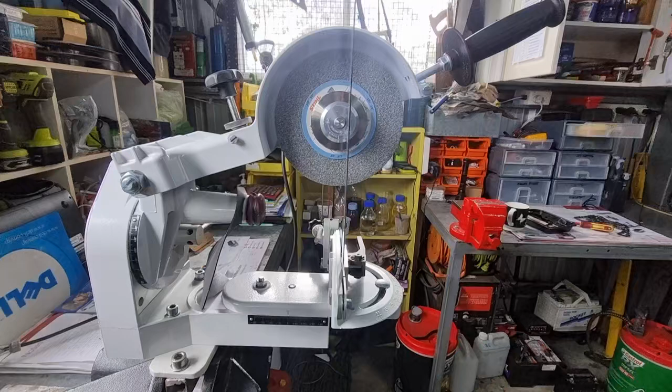Someone was asking me, can we do a 10-degree downward tilt on a USG grinder? And I said, yeah, sure we could, there's no reason why we can't because it's got a slide-in vise.

But if you look at the USG chart that actually comes with a USG grinder, you won't see anything that refers to a 10-degree downward tilt. What you will find in column B, column A refers to the grinder tilt, which is the top plate angle, that's the grinding wheel angle that comes into the tooth. So that's A. B is the sliding vise, and C is top plate.

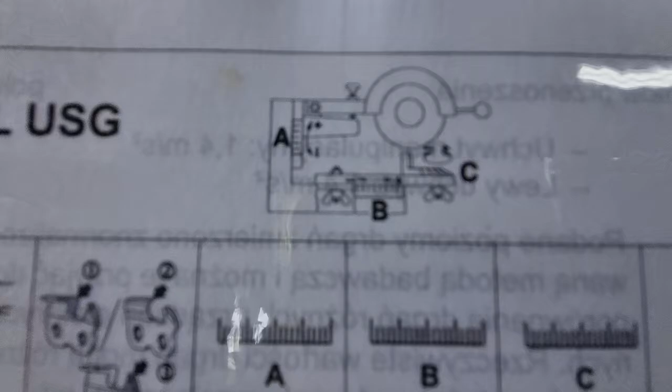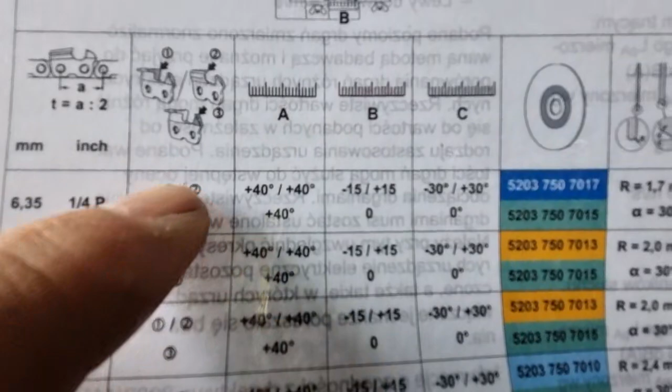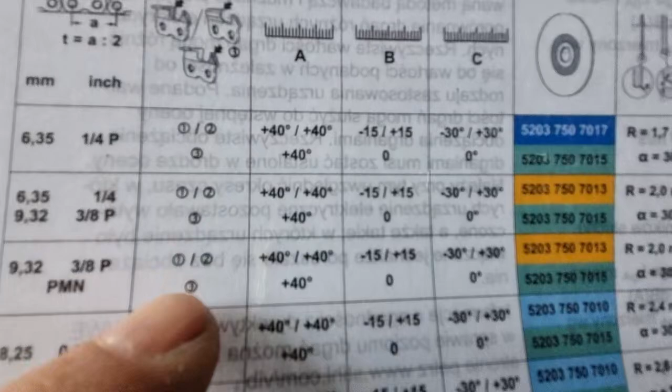So when you look at the little grinder, you'll see A, B, and C, that's what it corresponds to. You'll also see a little tooth there with number 1, number 2, and number 3. In these little check boxes, you'll see 1, 2, and 3 down the bottom, so that corresponds to that. This is left, right, and this is for the rakers, so all on these bottom boxes, number 3 is all the raker settings.

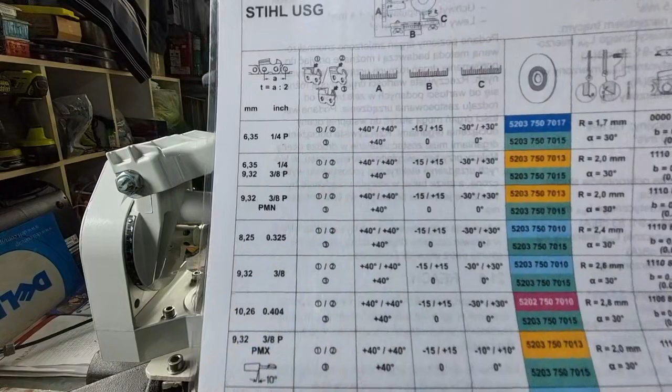So don't get confused. If we look, it still uses 40 degrees on virtually everything, except when we get to rapid hexa down the bottom. RH is rapid hexa, and these are your tungsten carbide. But from there upwards, it's 40 degrees for everything, so you could virtually set and forget.

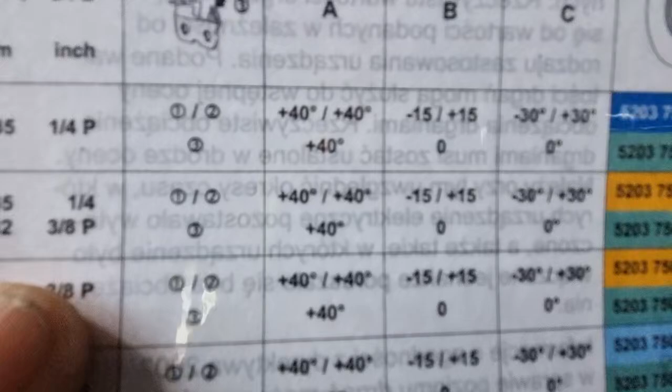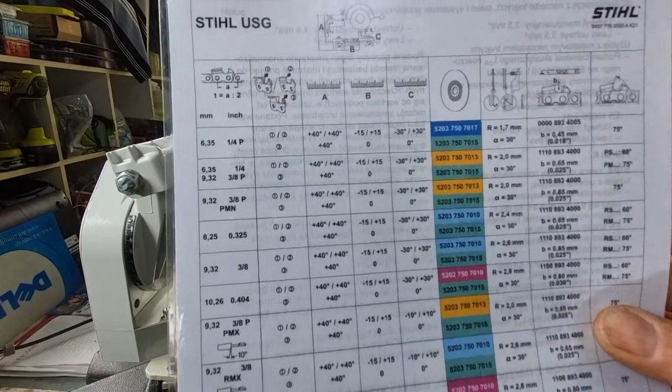The B scale refers to the vise, and if you have a look, you'll see -15 / +15, and that goes all the way down till we get to the same thing, right down to the tungsten carbide and also the rapid hexa. This scale here refers to a top plate angle, so why on every chain except the tungsten carbide and the hexa is it -30 and +30?

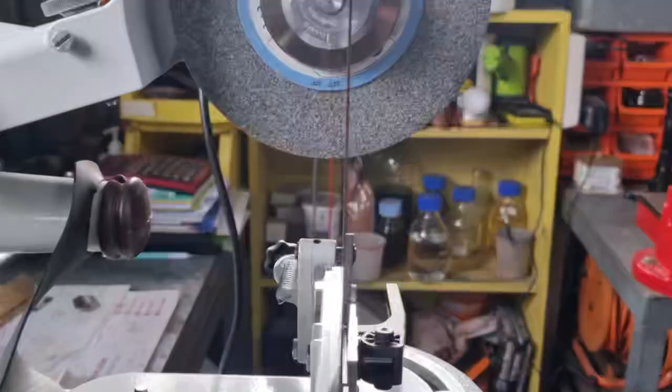This scale is in millimeters, it is not in degrees. That's where a lot of people get confused. So if we zoom in there, hopefully you can see that, that's in millimeters.

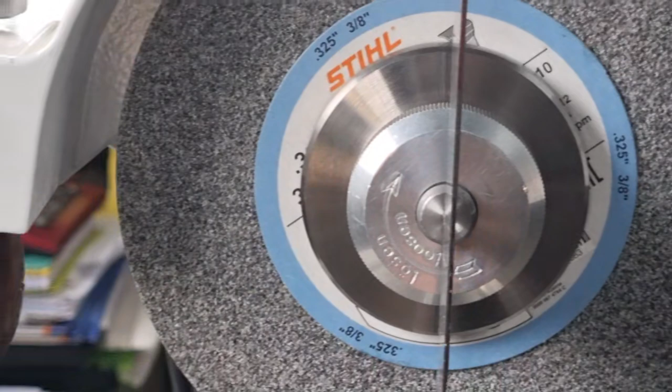Now, what I wanted to draw your attention to was when we spoke about the -15 and the +15, that is what is referred to as offset grinding. By offset grinding I mean that if we zoom in and pull this wheel down and set this up correctly, you'll see that the wheel, the ruler that I've inserted into the gap here, into the bar rail where your chain sits, in that gap I've inserted a steel ruler, which is quite straight. I've set the B scale on 0, and I pull this down into the grinding position, and it's right in the middle. But as that wheel gets smaller through grinding, we're going to have to offset it.

To give you an example, this wheel is 140 millimeters in diameter, and it's fine. By the time the wheel gets down to 130 millimeters in diameter, we're going to have to go 1 millimeter that way. By the time it gets down to 120 mils, we've got to go 2 mils that way. By the time it gets to the end of its life, 110 mil, we've got to go 3 mils that way.

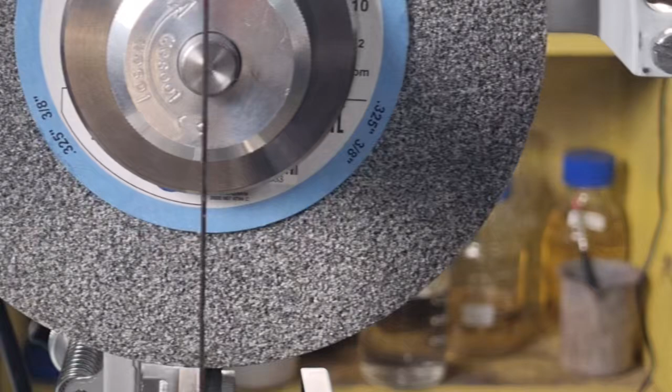Now, to show you why you have to do that, just look up there and say, oh look, look at the center of the spindle, look how far it is from the steel ruler. But as we bring the handle down, it gets closer to the steel ruler, the center line comes into alignment, and by the time you get down to the bottom, it's in perfect alignment. And that's where you've got to keep it, in that alignment.

Now, how does Stihl get around it? They get around it by offset grinding, meaning that you move the vise to minus 15 or to positive 15, depending on whether you're doing the left or the right hand tooth. That means you go past the centre line and you'll never have any centre line issues as the wheel wears down because you're going 15 millimetres.

Now, not to confuse you, when we look at the left and the right tooth of a chain, it's viewed from the back of the grinder. I'm viewing from the front, so we need to go round the back.

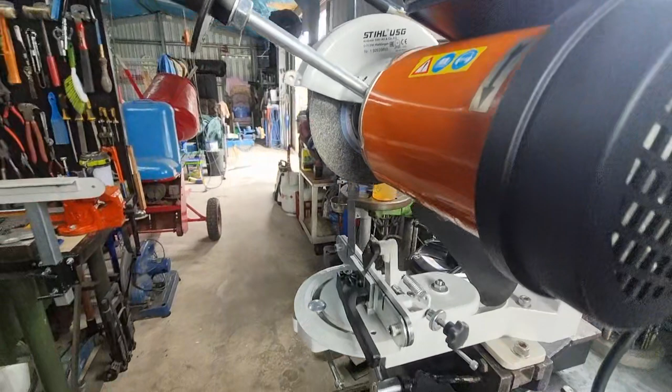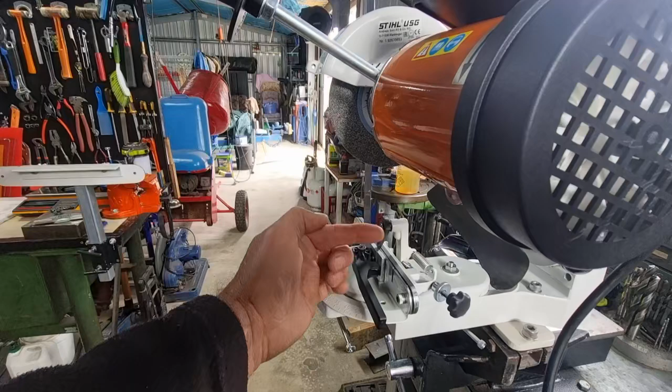So if you were to look at that USG chart, it's got 1, 2, and 3. Number 1 refers to a left-hand tooth, number 2 is a right-hand tooth. So with a left-hand tooth, if you look at the USG chart under column B, it'll say you've got to go minus 15 in that direction. For the right-hand tooth, you've got to go positive 15 millimetres in that direction. That is offset grinding, 15 millimetres is quite a fair amount from the centre line.

And that's the way that works. That way you don't have to worry about that alignment that I was showing you. But if you've got an Oregon grinder, you can go on Oregon's website and they'll show you how to put a ruler in and do that with an Oregon style grinder.

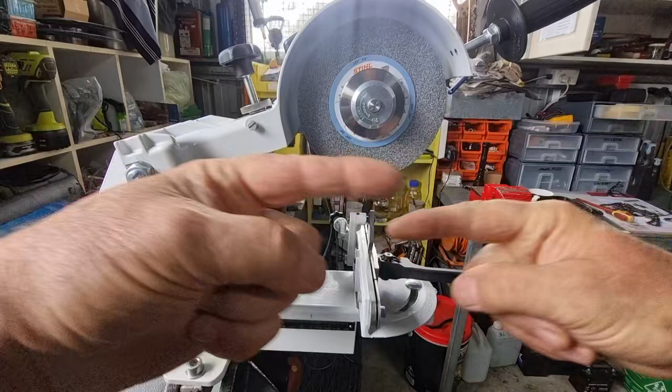Now, the 10 degrees downward tilt. To do a 10 degrees downward tilt, it's offset grinding as well. But rather than cross over that way, which is what the USG grinder is doing with the negative and the positive, going from one side to the other, when we do a 10 degrees downward tilt, and if I stand back here, this is the left tooth and this is the right tooth, viewing it from the back, we move outwards.

We move away from the centre line when we do a 10 degrees downward tilt. And I'd probably give this about, on the scale we've got here in millimetres, about 6 millimetres to this side, 6 millimetres to that side. So when we put a chain in, we'll do that now.

This is just an old chain. And it's the opposite of an Oregon. So the left hand tooth is on the outside, the right hand tooth is on the inside. So if I was going to do a left hand tooth, I would loosen the vise and come over about 6 millimetres like that. If I was going to do a right hand tooth, which is this side, I would push it 6 millimetres to the right side.

Just remember that whichever tooth you're doing, right or left, you've got to move the vise away from the centre line. So you move it that way for the left hand tooth, that way for a right hand tooth. And that's it, that's all you've got to do. You'll get the same tilting that you would get on an Oregon style grinder.

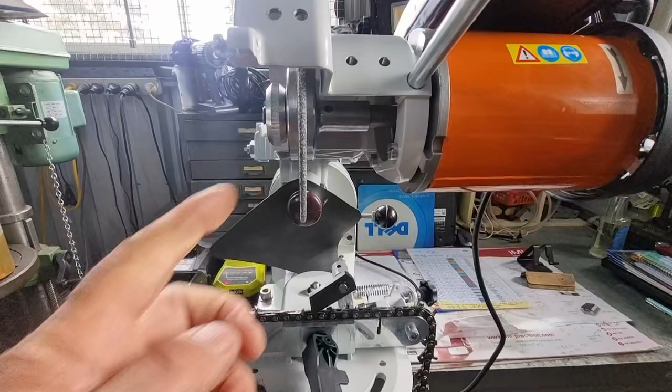Only one other point I would make is that the grinding wheel on the Stihl USG grinder is only about 4.1 millimetres maximum. Make sure that this profile, that U shape on there, is the right shape. If you have the wrong shape here, you will definitely get a different side plate angle.

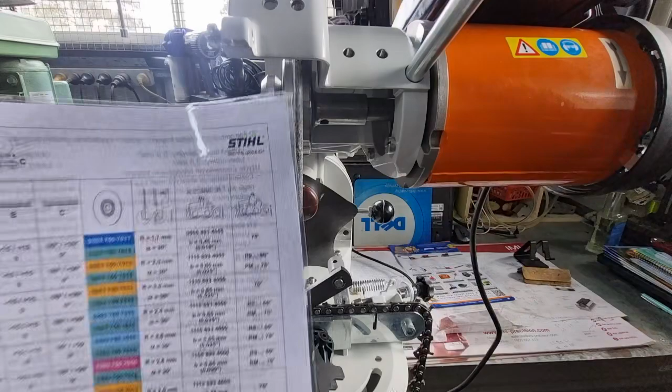Now, normally what they're saying to you, if you follow the Stihl USG chart, even though you set this head to 40 degrees, if the wheel's dressed correctly, you generally end up, if you look at the last column on a USG chart, with either a 60 or 70 or 75 degree angle. That's what you should end up with.

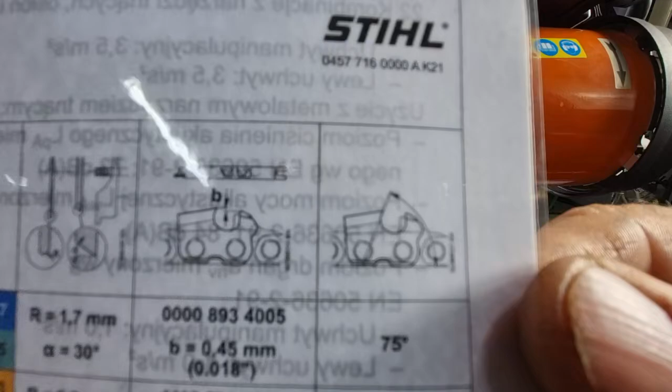And that's what the little icon up there means, that's the side plate angle. There it is, 60 degrees, 75. So even though you set this to 40 degrees here, you may set this to 40 degrees. Now, I hear some of you say, 40 degrees, wow, that sounds like a fairly aggressive angle on the head.

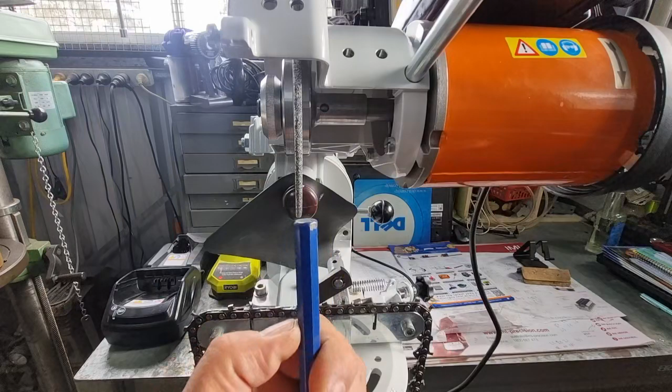Stihl don't use the 90 degree reference point. On a Stihl USG grinder, the vertical reference point is 0. So we're actually moving over to 40 degrees. On an Oregon grinder, you start at 90 degrees. If you were to move 40 degrees in that direction, it would be 50. So that's what it is.

Now, typically on an Oregon grinder, a lot of times we move over from 90 into the 60 degree position, so that's a 30 degree movement from vertical there. On a USG grinder, we start at 0 and we would move over to 30, so we've only moved 30. Everything is the opposite on a USG grinder.

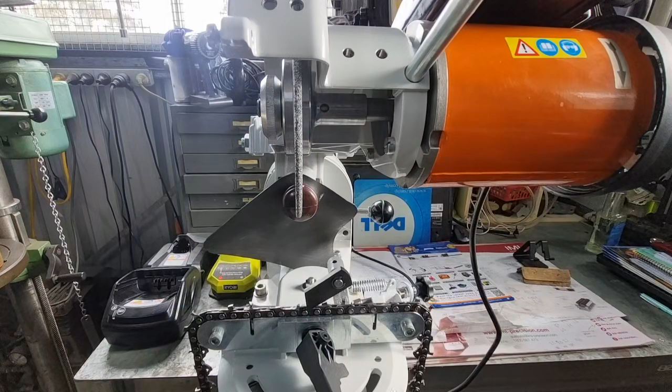It's the same as the teeth here. On an Oregon grinder, you'll view the teeth from that way, so left and right is the other way around. So everything's a little bit different on a USG grinder. I actually prefer it this way. I'm used to it, doesn't matter whether I use Oregon or Stihl. I'm used to both. So that's pretty much it in a nutshell.

I do have a tooth, part of a chain that I ground up before, and I'll bring it over to the bench and we'll have a look at it over here, because I really want to show you what the Stihl did, how it works.

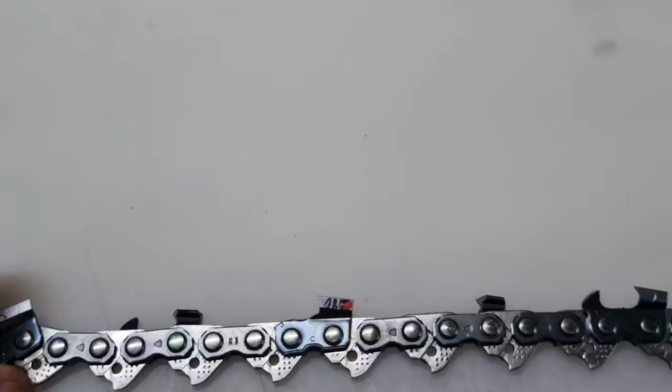And this was on the Oregon grinder, 10 degrees downward tilt. Not too bad, is it? Happy with that? This is on the Stihl. Now that's exactly the same settings. That's 40 degrees on scale A. The vise is positive 6 millimetres. And the top plate cutting angle, that's the angle on top there, that's 30 degrees.

So just remember, that's your left-hand tooth. We moved it that way, positive 6 millimetres. If it's a left-hand tooth on a Stihl USG grinder and you want 10 degrees downward tilt, move it that way. Just remember, the tooth moves away from the wheel, not in towards it. The standard setting is move 15 millimetres in towards the wheel and past the wheel. So for a left-hand tooth, you'll move towards the wheel, past the wheel, 15 millimetres off the centre line. That's the way it works.

Look, I hope that information helps. The Stihl USG grinder is a brilliant grinder. As I say, some of the settings are a reverse of the Oregon type grinder, so I hope that information helps. Thanks for watching. Bye for now.